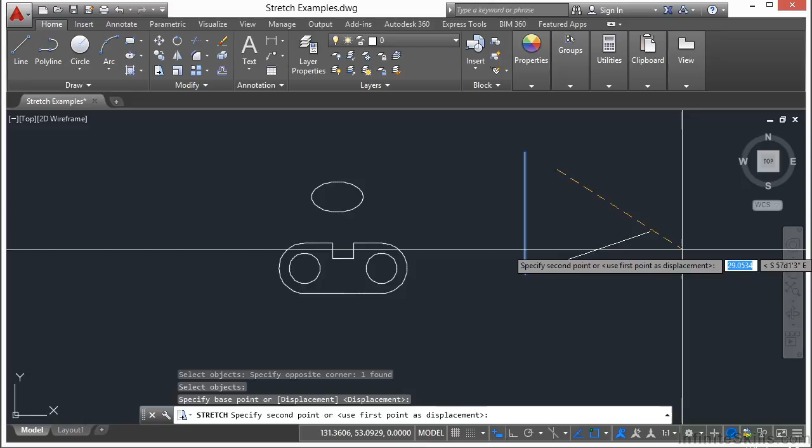But if I turn ortho off, start the stretch command, select my objects, pick my base point, you can see here that I'm stretching it in all sorts of different directions. So you can use the stretch command as a kind of rotate, to move an object, for a lot of different things.

Selecting objects to be stretched can be quite tricky because of how the command works. Most editing commands need you to pick the entire object, so it's easy to get your selection right. But in the stretch command, it's not so easy because you're really moving the vertices. And the vertices could be an endpoint, a midpoint, point of intersection, center point of a circle or arc, etc. So you're moving those vertice points, not necessarily the object itself.

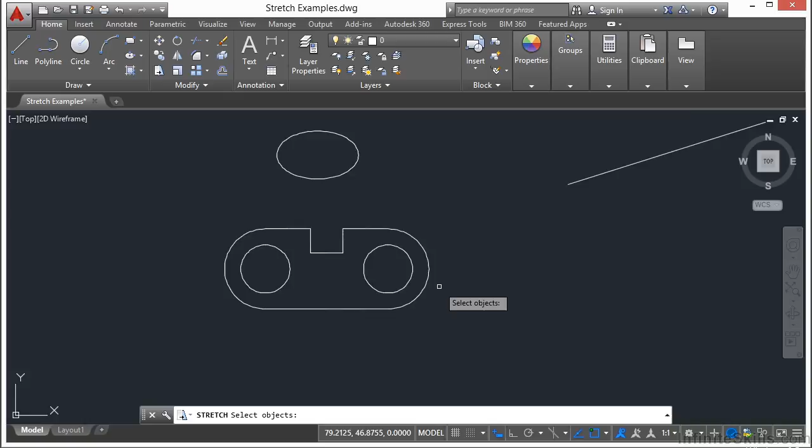Let me show you what happens when you stretch this object here. I'm going to pick these objects, and you can see as I move my crossing selection window over, the objects I'm selecting become highlighted. So I crossed through and picked up this arc, these two lines, and this circle. I'm going to turn my ortho command back on. I right click and pick my displacement point, and now I stretch.

That's really cool. That's really hard to do in board drafting, and this is another tool where AutoCAD is superior to board drawing. So note that when I started my stretch command, this is what I selected, and I only moved the vertice endpoints for this line, for this arc, same here. I also grabbed the center point, or this entire circle and this entire arc. So all of these objects are moving together or being stretched together relative to each other.

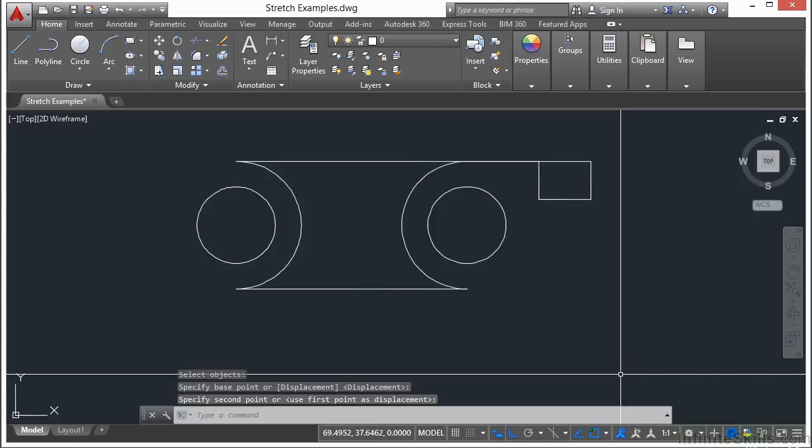And if I were to keep going, it would give me an object that looked like that. Let me undo this and put it back together.

Now I can select these objects, and then unselect an object from my set. If I hold down the Shift key and select that circle, it's removed from my selection set. So I right click, pick my base point, and now I can move this end of this bracket, offsetting it from this hole that's going to be there.

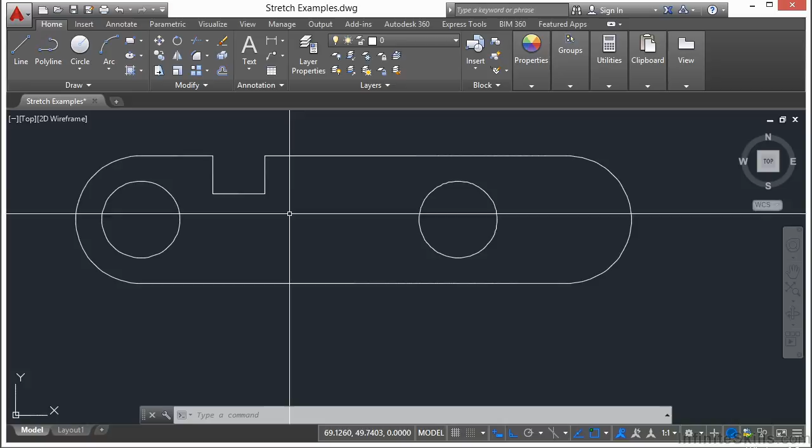I can do the same thing here. Stretch that, I can just stretch the bottom part of it. And that allows you to make that little cutout larger and in a different position.

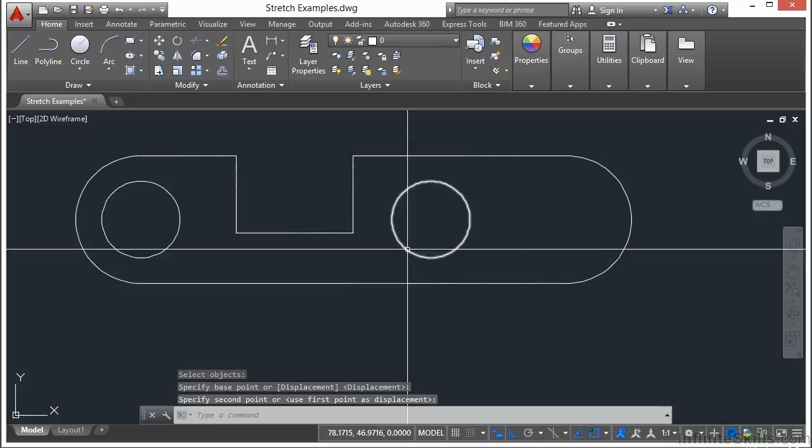One last thing I want to go over with the stretch command: there are some objects that can't be stretched, such as circles. If I try to stretch this circle, all it's going to do is move it, and that's only if I grab the center point, which you can't really see there. That's because a circle really doesn't have any vertice points. It does have these quadrant grips, but you move it from the center of the circle. So keep that in mind.

Another object is an ellipse, which is what I have right here. That's because its properties are almost identical to that of a circle, as you can see here. So just keep those things in mind.

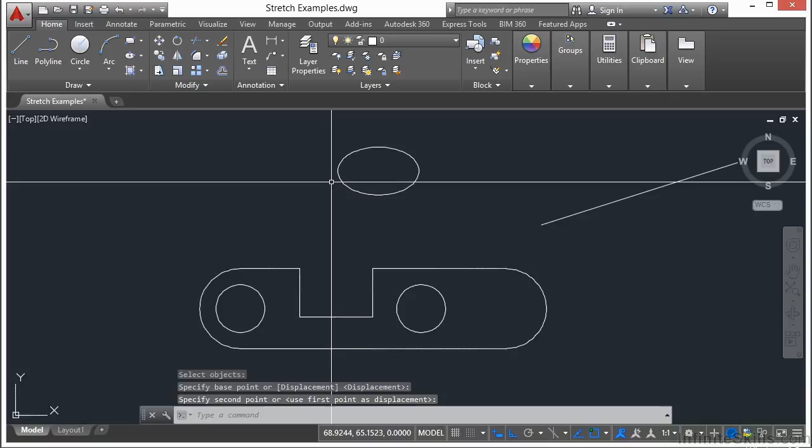I can change the ellipse if you do need to sort of stretch it through grips, grab the point and kind of stretch it that way. A circle works the same way. So if I need to make the circle a little bigger, I can do that through the grips, but not the stretch command.